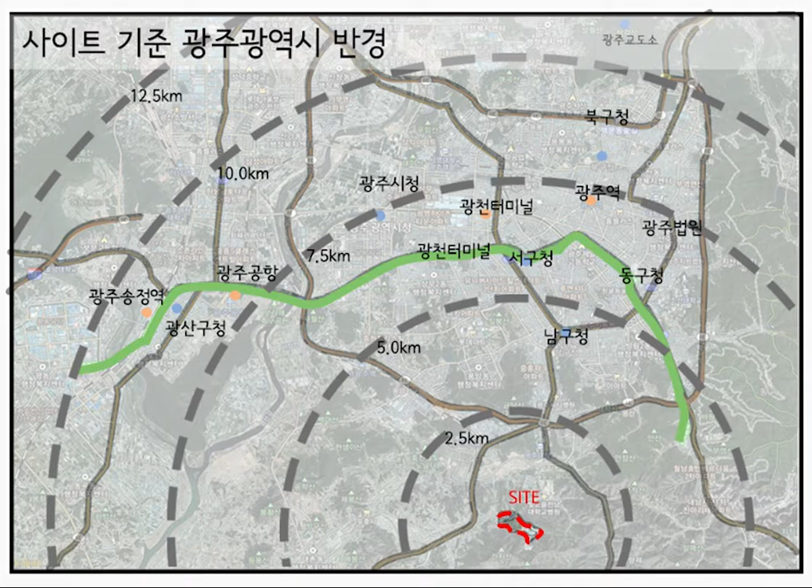Correctional facilities should be selected as non-urban areas due to danger, but they are designated as out-of-town areas because they need to use urban facilities for social adaptation, training, and civil servants' commuting. The following are the detailed reasons for site selection.

Site selection location: 146 Yenyangdong, Namgu, Gwangju. The site is a mountainous area, useful for controlling the number of visitors due to having only one traffic road. It may be used for social adaptation training programs related to an arboretum, theme park, hospital, etc. nearby.

Correctional facilities are dangerous, so there should be no floating population around them. The mountainous areas visually block the correctional facility, composed of mountains on 3 sides, naturally becoming a basin-type site for natural isolation.

This naturally isolated land was divided into 120,000 square meters of flat land, making it easy to monitor and control, and was selected as a place to create its own small society.

Based on the current site, the basic design plan is, first, to create a site relationship. A small society may be created by dividing society physically, and an open space may be provided for improving the working environment of public officials and correcting inmates within this small society.

Second, because facility freedom is required for correctional education, it improves the working environment by breaking down boundaries and providing open space to public officials when inmates use the facility.

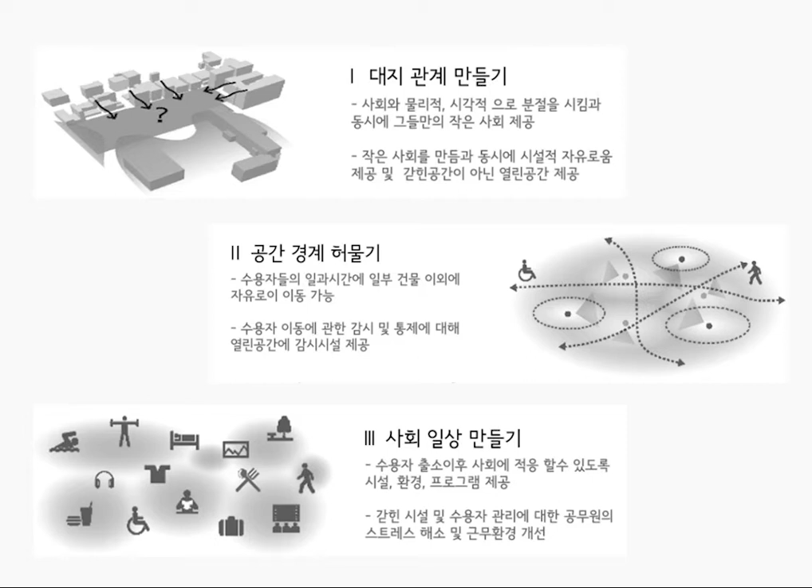Third, if some freedom of action was obtained, a system of enlightenment should be established together while improving the working environment to gain mental and physical stability for public officials.

The following is a layout plan that fits the site based on the basic plan mentioned earlier. First, basically restricting access and exit elements for the security of correctional facilities using pylons and walls.

Second, the classification of entrances for inmates, public officials, and outsiders through restricted entrances. Third, a reception unit in the center that can be easily monitored from anywhere and is visible from all directions to prevent escape.

Fourth, after the establishment of the acceptance unit, the monitoring system is further increased in the form of capturing the acceptance unit by compartmentalizing systems such as enlightenment and main buildings for inmates and public officials.

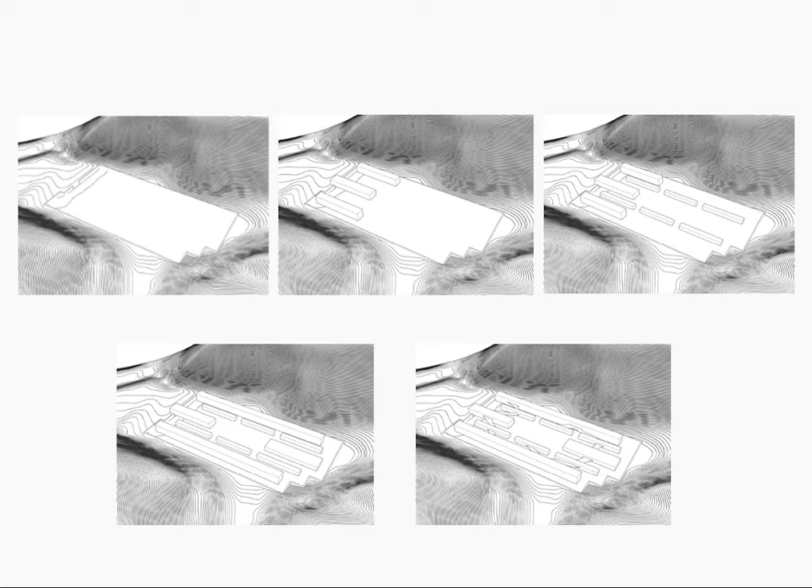Fifth, after the establishment of each dome, the goal is to set up a bridge for the convenience of movement between each dome, increasing accessibility and the monitoring system by increasing the utilization rate for public officials.

The deployment plan according to the site was divided into administrative dome, Kyowa dome, and main building. The main role of this building was to provide necessary support facilities for inmates and to provide the working environment for public officials. The main role of the administrative dome is that public officials plan to manage the prisoners' personal information and meeting facilities such as CCTV.

Administrative dome is a facility directly connected to the outside world, and security is set to level 2 to 3.

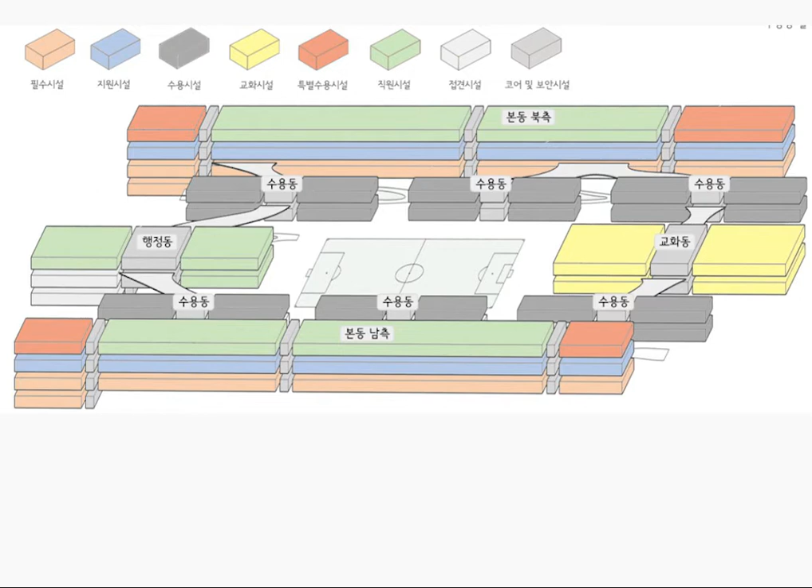Kyowa Dong is a facility where inmates can adapt to society after being released from prison, with spaces such as technology and education planned. Please refer to the following information for each facility's characteristics.

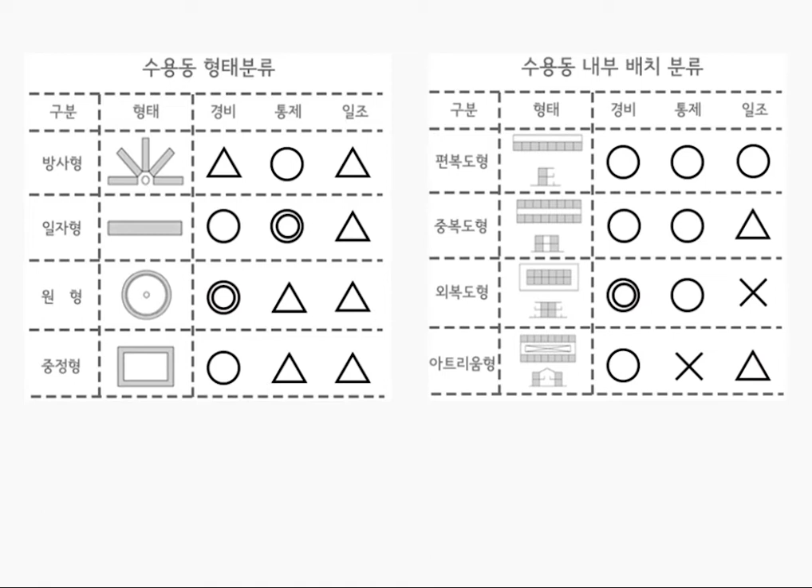Refer to the following table for the reason for the choice of straight and single-sided shape of the receptive dome. In the straight line type, it is possible to improve the working environment of public officials by smoothly controlling the number of inmates, such as whether or not to identify them. The internal layout plan was established because it was easier to guard, control, and provide sunlight than other layouts. However, since a straight single corridor form can be monotonous, the interior layout can be partially changed, and exterior windows can be added to remove the monotony, allowing the facilities to be monitored from both sides.

Next is the Basic Acceptance Unit. The accommodation unit was proposed as a 3-to-4 person facility and a 1-person facility, set at least 3.4 square meters per person. The 3-to-4 person facilities were set at 110, and the total number of prisoners was set at about 500. It is also proposed to include a 3-person hospital room and a punishment room. As a special camp, the hospital room is planned to accommodate about 80 people, and the punishment room is designed to accommodate about 50 people.

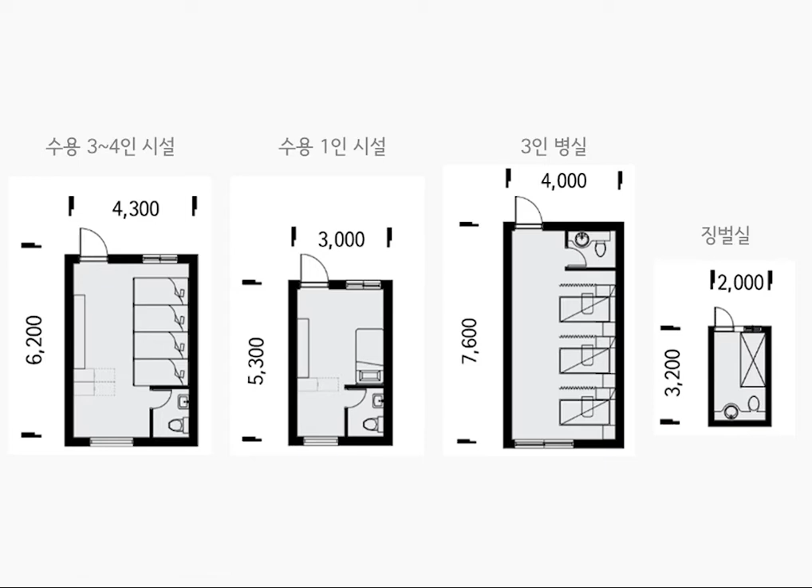The following are the programs for each building. The Administrative Dome has planned counseling facilities for the reception and psychological stability of inmates. Basic administration is provided by the administrative movement of public officials. The main building provides essential and supporting facilities for inmates, and plans for the CRPT task force waiting room and multipurpose rest facilities, to improve the working environment of public officials in case of any bloodshed.

The accommodation unit we mentioned previously planned the prisoners' daily hours as shown in the following table.

The following is a plan for Kyowa Dong and the external space. Kyowa Dong basically proposed spaces for learning, technology, and education. The outer space provided an open area in the facility for the playground and walking space, and a bridge was set up so it could have an open view, as well as an open space for public officials.

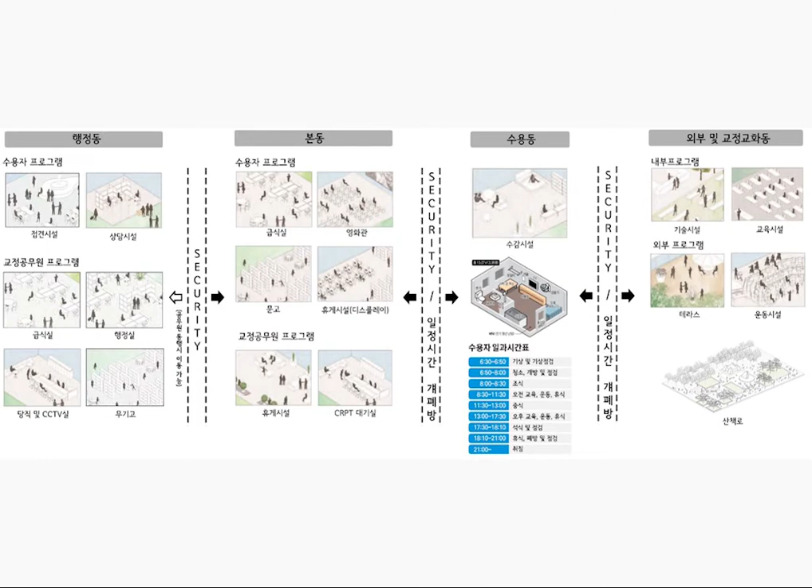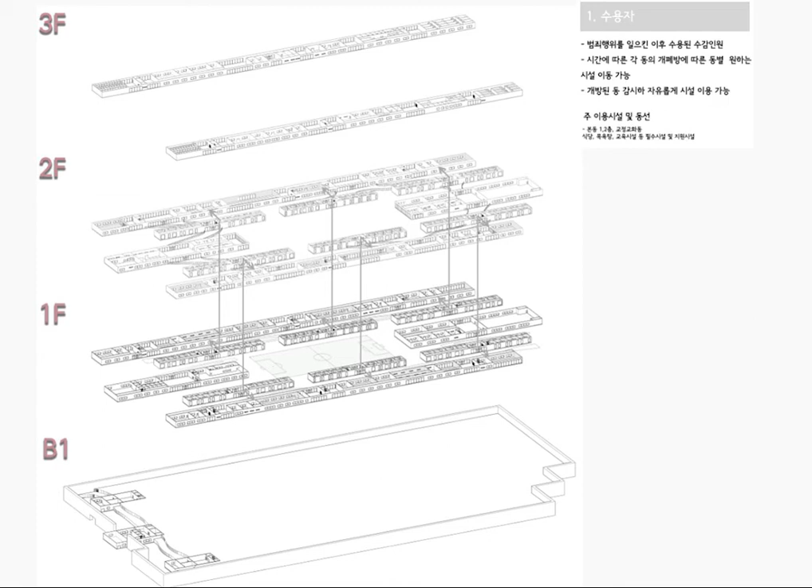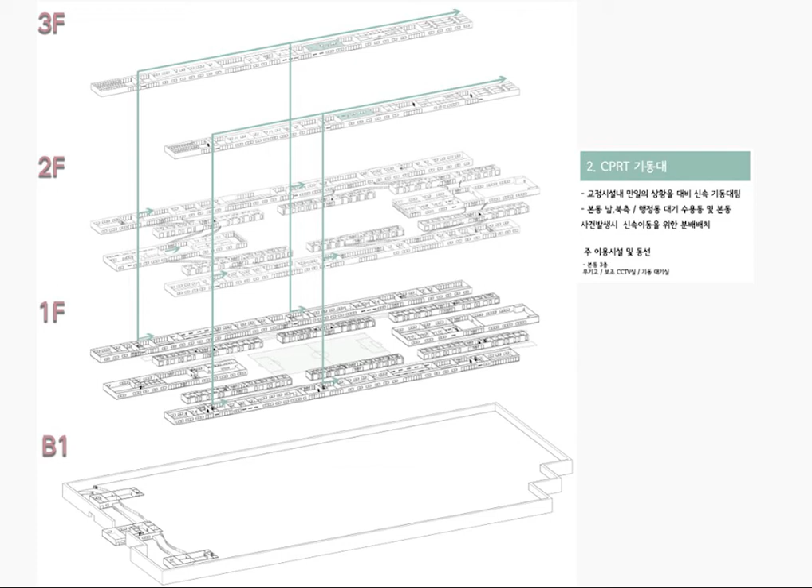Next is the route of the correctional facility. The central accommodation building is divided into 2 floors, and after the accommodation building is opened, the security space of the main building's 1st and 2nd floors is freely available, and the number of inmates who want to learn skills and education is selected and trained. In the event of bloodshed at the CRPT prison, the waiting stations were divided into main building south, main building north and administrative building for rapid control. Except for Kyowa Dong, the plan was to control bloodshed when moving by floor.

Next is the movement of civil servants. A public official can freely move through all the buildings with the personnel who monitor and control inmates at ordinary times, but because the scope may be too wide, he should improve the intensity of his duties by compartmentalizing the space according to the time zone.

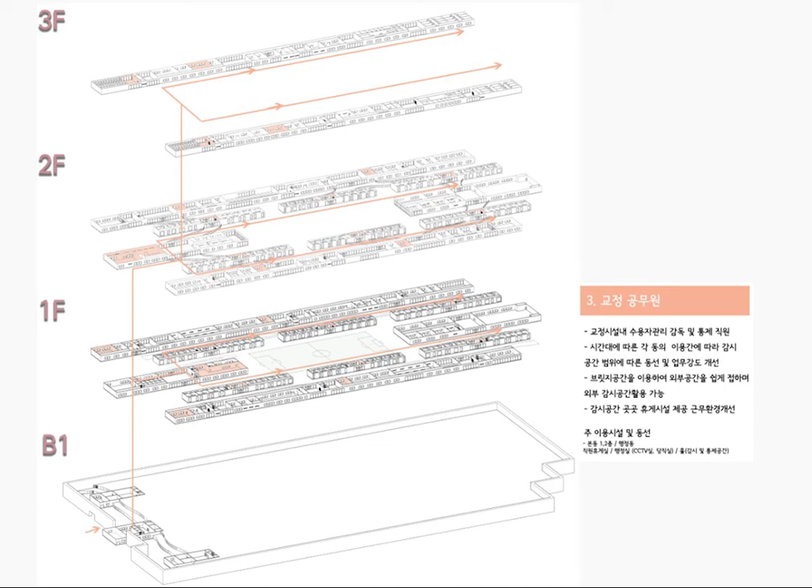Bridge space planning reduces movement lines and increases accessibility to the outside during movement. By dong, it also makes the outside an easily surveilled, planned space.

It's a line of movement only for outsiders, visitors, and instructors. Since outsiders and visitors are directly connected to the outside world, they must go through administrative facilities or security facilities, and the facilities available to them are extremely limited. In particular, the bridge space was planned to improve the working environment at the same time. The CPRT waiting room was arranged for rapid control.

The security facilities meant outsiders had to go through 2 to 3 security checkpoints. The main purpose of this design is to improve the treatment environment for public officials and to improve the environment for prisoners, to prevent recidivism, to limit their own small society within the confined space of the correctional facility, and to provide psychological and physical stability.